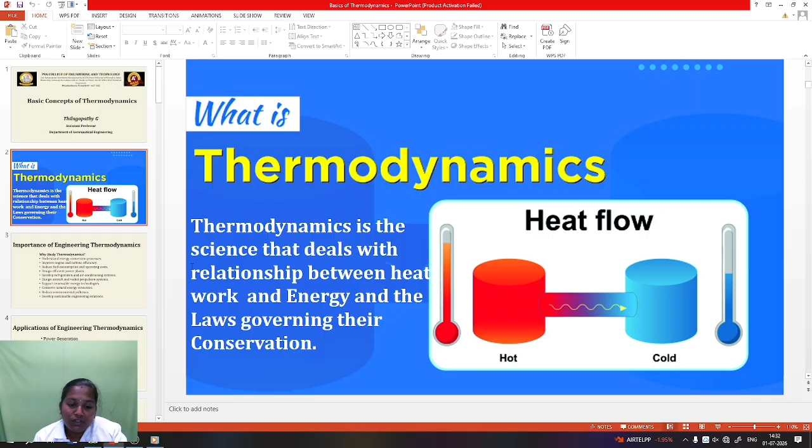So next let us discuss why thermodynamics is one of the most important studies in engineering, especially in aeronautical engineering. Every engineering system either produces energy, transfers energy, or uses energy efficiently. Thermodynamics provides the scientific principles needed to understand and improve this energy conversion process. Let us discuss each point one by one.

First, understand the energy conversion process. For example, in an aircraft engine, chemical energy in aviation fuel is converted into heat energy during combustion. Heat energy is converted into mechanical energy by the turbine. Finally, mechanical energy produces thrust to propel the aircraft. Without thermodynamics, engineers cannot analyze this energy transformation.

Second, by applying thermodynamic principles, engineers can improve engine and turbine efficiency, reduce specific fuel consumption, increase flight range, lower airline operating cost, and improve overall aircraft economics.

Next, thermodynamics is not limited to aircraft. It is also used in thermal power plants, nuclear power plants, and combined cycle power plants. The same thermodynamic principles used in gas turbines are also applied in aircraft propulsion systems. To provide a comfortable cabin environment, aircraft use environmental control systems (ECS). Thermodynamics helps to design aircraft air conditioning systems, cabin pressurization, and refrigeration cycles, and it is important for designing aircraft and rocket propulsion systems. This is one of the most important applications for aeronautical engineers.

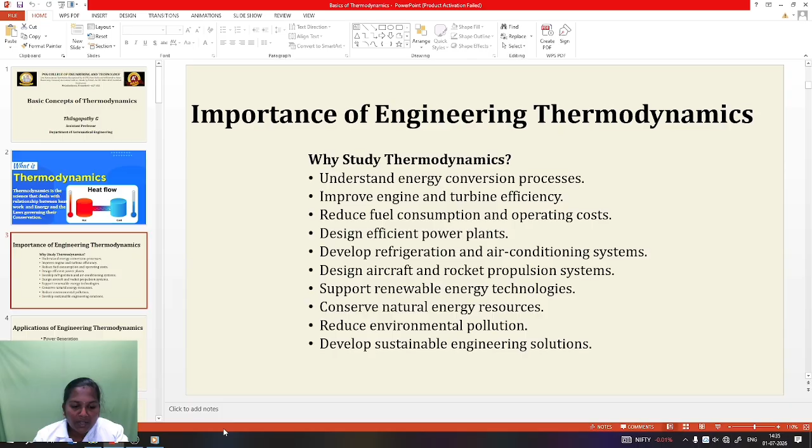And modern aviation is moving towards cleaner energy sources. So thermodynamics contributes to solar thermal systems, hydrogen powered aircraft, sustainable aviation fuels, fuel cell technology, and the like. Fossil fuels are limited resources. By improving engine efficiency through thermodynamics, engineers can consume less fuel, extend the availability of natural resources, and promote energy conservation. So next, as future aeronautical engineers, you will use thermodynamics to build safer, cleaner and more efficient aircraft.

Now that we have understood the importance of thermodynamics, let us see where it is applied in real engineering systems. Thermodynamics is one of the most widely applied branches of engineering. Every system that involves heat, work, or energy conversion uses the principles of thermodynamics. Let us discuss some important applications.

Number one, power generation. One of the major applications of thermodynamics is in power plants. In thermal power plants, coal, natural gas or other fuels are burned. Heat is used to convert water into high pressure steam. The steam rotates the turbine, involving boiler efficiency, turbine efficiency, overall plant efficiency, and fuel consumption. The goal is to generate maximum electricity while using minimum fuel.

Next, automobile engineering. Thermodynamics plays an important role in automobile engines. In petrol and diesel engines, fuel burns inside the cylinder. Chemical energy is converted into thermal energy, and thermal energy is converted into mechanical energy. This work rotates the wheels of the vehicle. Engine performance, fuel economy and emissions are analyzed using thermodynamic principles.

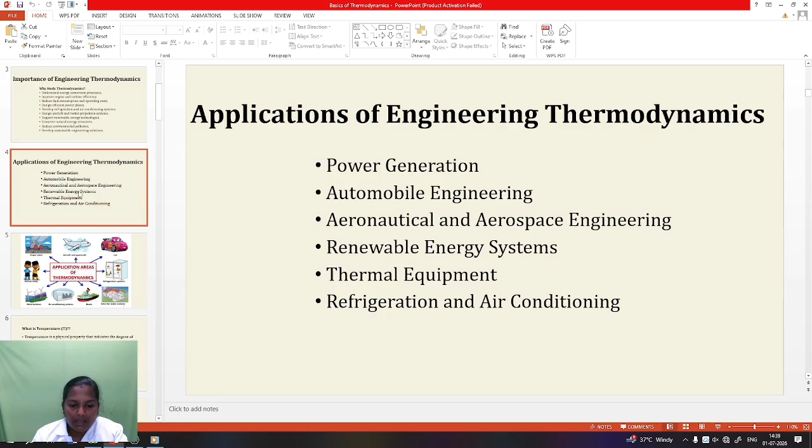Next, thermal equipment. Many industrial devices are designed using thermodynamic principles. Examples include boilers, heat exchangers, steam turbines, compressors, pumps, and condensers. These devices are used to convert energy, making thermodynamics essential for their design and operation.

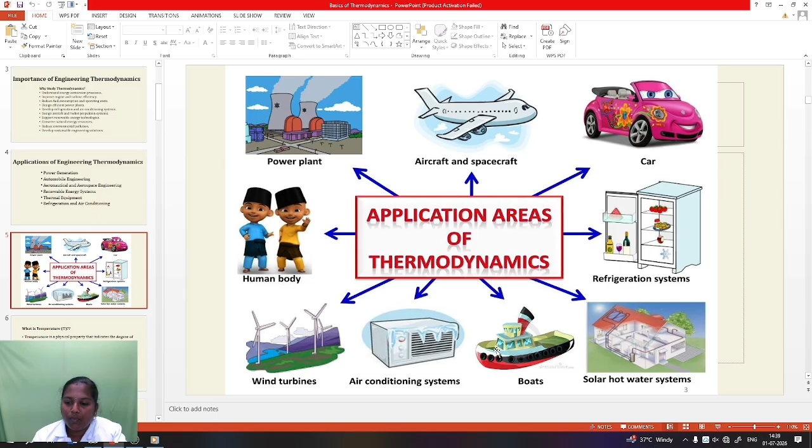These are the pictures for application of thermodynamics in areas like power plants, aircraft, spacecraft, cars, air conditioning systems, boats, solar hot water systems, and refrigeration systems.

Now let us understand one of the most fundamental concepts in thermodynamics. What is temperature? Temperature is a physical property that indicates how hot or cold a body is. In simple terms, it tells us the thermal condition of an object. Temperature is related to the average kinetic energy of molecules in the substance. The faster the molecules move, the higher the temperature; conversely, slower molecular motion indicates lower temperature.

One of the most important roles of temperature is that it determines the direction of heat transfer. For example, imagine placing a metal spoon in a cup of hot tea. The spoon initially has a lower temperature than the tea. Heat flows from the hot tea to the cooler spoon, causing the spoon's temperature to rise. After some time, both reach nearly the same temperature and the heat transfer stops. So heat transfer stops when thermal equilibrium is reached.

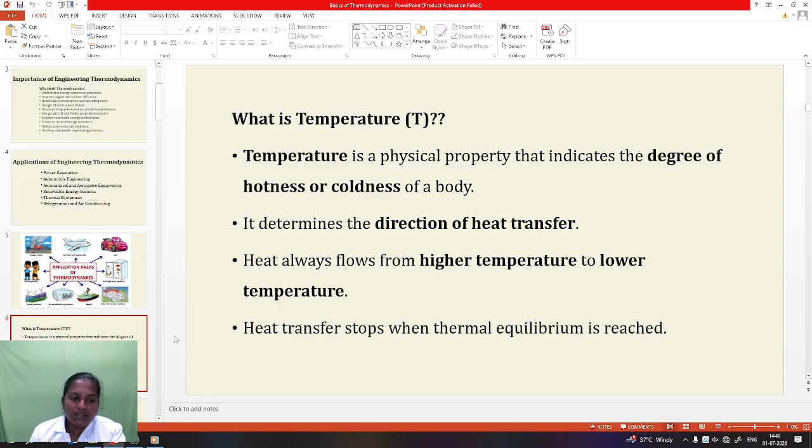In the previous slide we learned about temperature. Now let's understand what is absolute temperature. In our daily life we can use Celsius; we commonly use the Celsius scale to measure temperature. However, in engineering thermodynamics we use the Kelvin scale, which is known as the absolute temperature scale. The Kelvin scale starts from absolute zero, which is the lowest possible temperature that can exist.

What is absolute temperature? Absolute zero is the temperature at which the molecules of a substance possess minimum thermal energy. At this temperature, molecular motion becomes almost negligible. According to the laws of thermodynamics, no temperature lower than absolute zero is theoretically possible. The value of absolute zero is 0 Kelvin, which is equal to minus 273.15 degrees Celsius. At absolute zero, molecular motion is minimum.

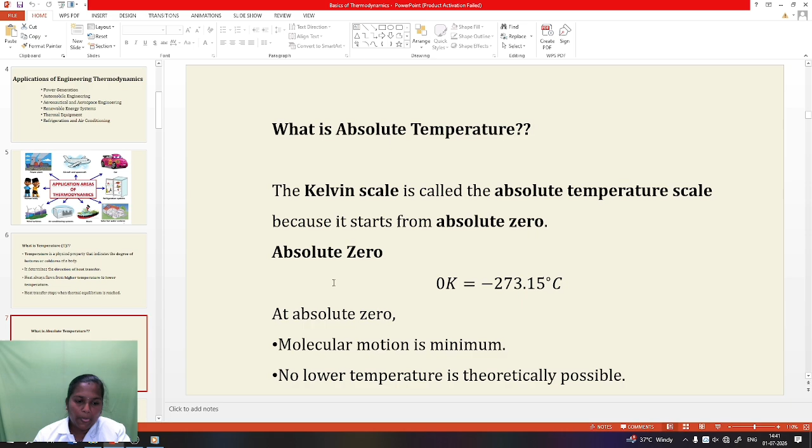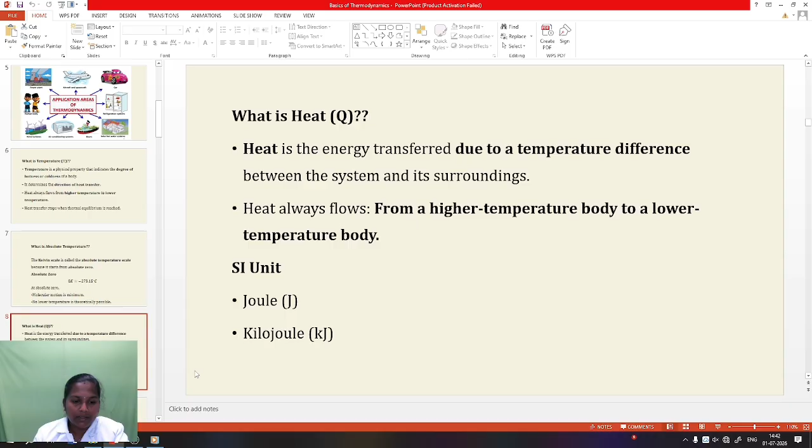Next, what is heat? Heat is the energy transferred due to temperature difference between the system and its surroundings, as already discussed earlier. Let us understand another important property called specific heat. Specific heat is the amount of heat required to raise the temperature of 1 kilogram of substance by 1 Kelvin.

For gases, we use two types of specific heat because gases may be heated under different conditions. Number one, specific heat at constant volume. Number two, specific heat at constant pressure. So what is specific heat at constant volume? Imagine a gas enclosed in a rigid container. Since the container cannot expand, its volume remains constant.

When heat is supplied, the temperature of the gas increases, the pressure increases, and the volume remains unchanged. Since there is no movement of the boundary, no boundary work is done. Therefore, all the heat supplied increases the internal energy of the gas. Heat added is given by Q equal to m times Cv times delta T, where m is mass, Cv is specific heat at constant volume, and delta T is the temperature difference.

Next, specific heat at constant pressure.

Now imagine gas inside a cylinder with a movable piston. When heat is supplied, the gas expands, the piston moves upward, and pressure remains constant. Here, the supplied heat has two purposes: one is increasing the internal energy, and two is performing boundary work by moving the piston.

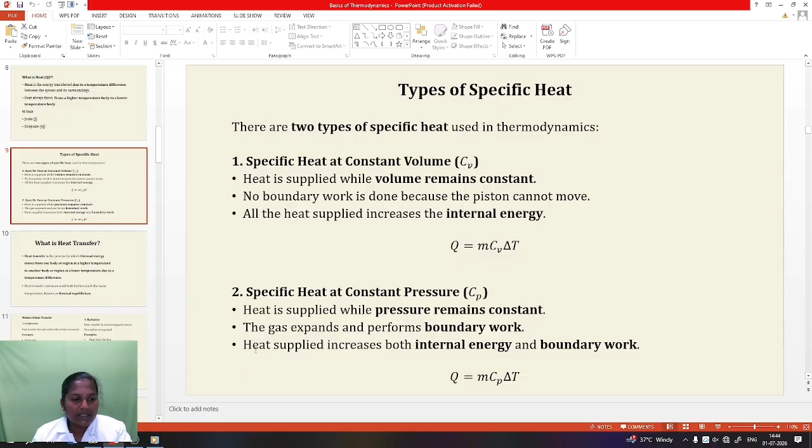Now let us understand the concept of heat transfer. What is heat transfer? Heat transfer is the process by which thermal energy moves from one body or region at high temperature to another body or region at a lower temperature due to the temperature difference between the two.

For example, if you place a cold metal spoon in a cup of hot tea, heat flows from the hot tea to the cooler spoon. This condition is called heat transfer. Heat transfer continues until both bodies reach the same temperature, known as thermal equilibrium.

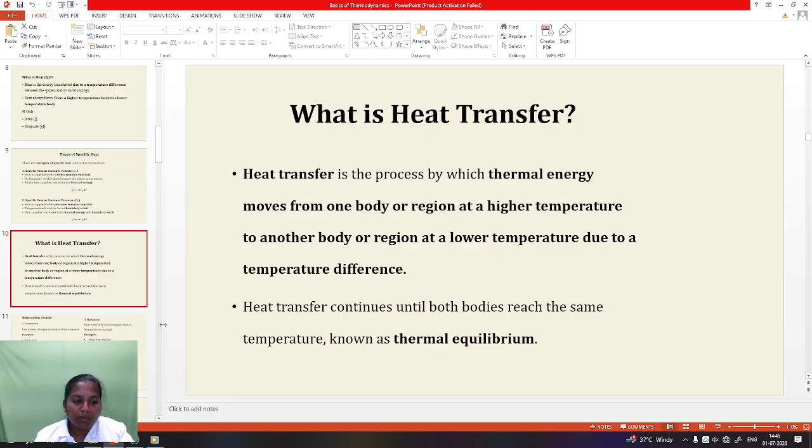Next we discuss the modes of heat transfer. There are three modes of heat transfer: number one is conduction, number two is convection, and third one is radiation. What is conduction?

Conduction is the transfer of heat through a solid without the movement of material itself. Heat flows from the hotter region to the cooler region through molecular interactions. Examples: heat passing through the wall of an aircraft engine, heat transfer through the boiler wall.

What is convection? Convection is the transfer of heat between a solid surface and a moving fluid such as air or water. The fluid carries heat as it moves. Examples: air flowing over the aircraft wing, cooling of an engine radiator, cooling of a turbine blade using airflow.

Convection can be divided into two categories: one is natural convection, and the other is forced convection. Natural convection is caused by density differences. Forced convection is caused by fans, pumps, or compressors.

Radiation is the transfer of heat by electromagnetic waves. Radiation does not require any material medium. For example, heat received from the sun, heat emitted by a furnace, spacecraft receiving solar radiation. Since space is a vacuum, radiation is the only mode of heat transfer there.

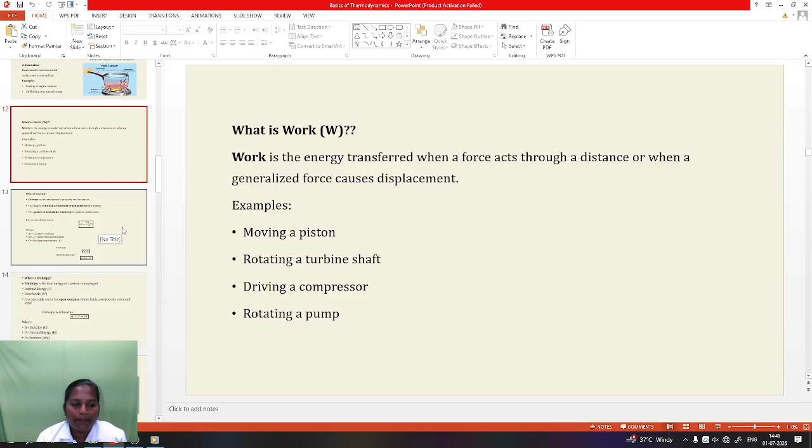The SI unit for work is joule. Examples of work: moving a piston in an engine cylinder, rotating the shaft of a turbine, driving a compressor, operating a pump, producing thrust in a jet engine. These are the examples of work.

Next, we discuss what is entropy, one of the most important and sometimes challenging concepts in thermodynamics. In engineering thermodynamics, entropy is a thermodynamic property that measures the degree of molecular disorder or randomness in a system, the quality or availability of energy to perform useful work. The greater the randomness of molecules, the greater the entropy.

Imagine two situations: ice, where the water molecules are closely packed and well organized, therefore entropy is low. Next is steam, where the molecules move freely in all directions and are highly disordered, therefore entropy is high. As a substance changes from solid to liquid and then to gas, its entropy increases.

For a reversible process, the entropy equation is dS equal to delta Q divided by T, where dS is change in entropy, delta Q is reversible heat transfer, and T is absolute temperature. The unit of entropy is kilojoule per Kelvin. For specific entropy, the unit is kilojoule per kilogram Kelvin.

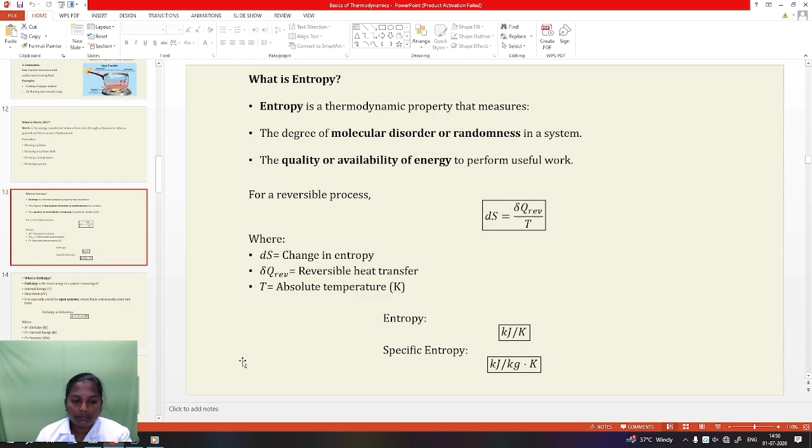So next, what is enthalpy? Enthalpy is the total energy of the system consisting of internal energy and flow work. It is especially useful for open systems where fluids continuously enter and leave.

Enthalpy is defined as H equal to U plus PV, where H represents enthalpy with unit kilojoule, U represents internal energy, P represents pressure, and V represents volume.

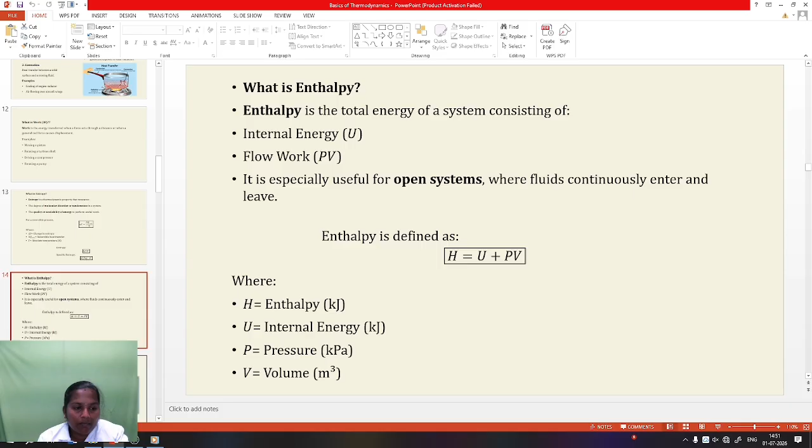Now let us study the two approaches used in thermodynamics, called the macroscopic or microscopic approach. The macroscopic approach is also called classical thermodynamics, and the microscopic approach is also called statistical thermodynamics. So what is the macroscopic approach? These are the two approaches used in thermodynamics.

The macroscopic approach studies the overall behavior of a system without considering the individual molecules. Instead of observing millions of molecules, we treat the substance as a continuous medium and measure only the properties that we can observe directly. These measurable properties include pressure, volume, temperature, and density, like moles.

For example, if we have a cylinder containing air, we do not study the motion of each air molecule. Instead, we simply measure the pressure, temperature, volume of the air. Using these properties, we can analyze the behavior of the system. This approach is called classical thermodynamics because it deals with the system as a whole.

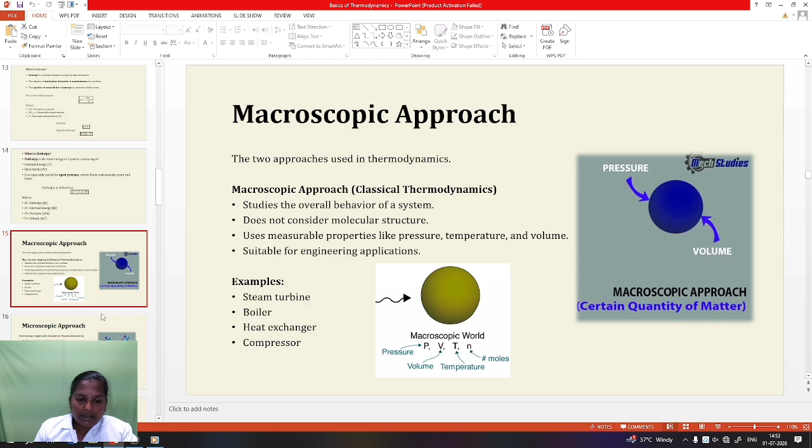The second method to study a thermodynamic system is called the microscopic approach or statistical thermodynamics. Unlike the macroscopic approach, the microscopic approach studies the behavior of individual molecules and atoms. Every gas contains billions of molecules that are constantly moving and colliding with one another. Instead of measuring only pressure and temperature, this approach analyzes molecular motion, molecular velocity, molecular collisions, and molecular energy distribution. Since it is impossible to track every molecule individually, statistical methods and probability theory are used to predict the overall behavior of the system. This is why it is also called statistical thermodynamics.

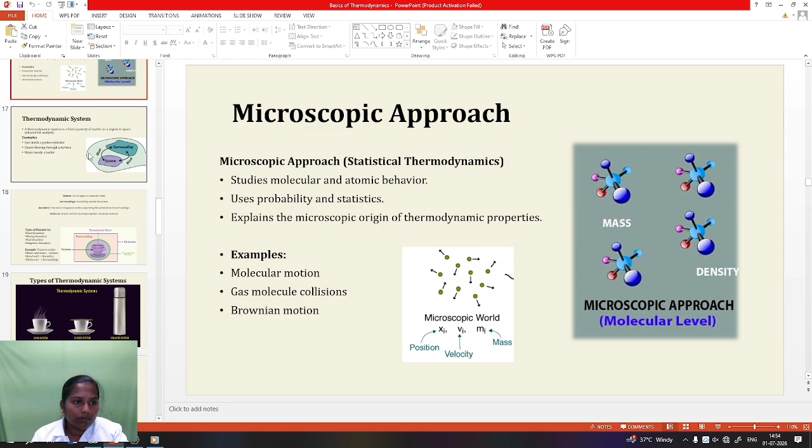Now let us discuss one of the most fundamental concepts in thermodynamics, the thermodynamic system. Before analyzing any engineering problem, we must first define the system we want to study. What is a thermodynamic system? It's a fixed quantity of matter or region in space selected for analysis. In simple words, it is the part of the universe that we choose to study. Everything inside the selected region is called the system, while everything outside it is called the surrounding.

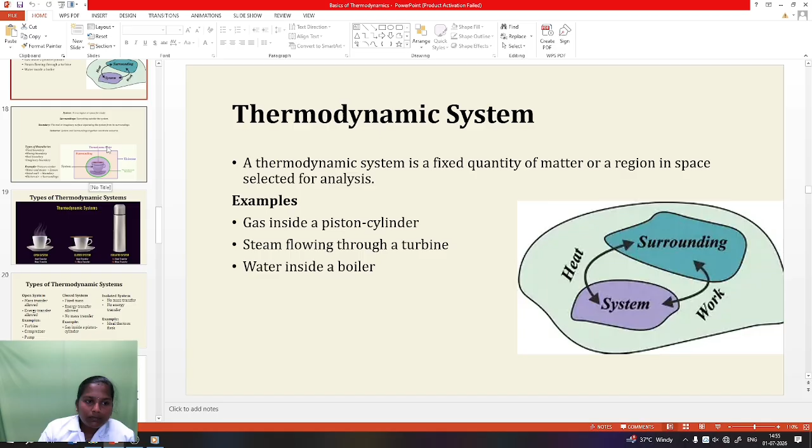Everything outside it is called surrounding. The surface that separates the system is called the boundary. The boundary may be real or imaginary. The combination of system and surrounding is called the universe.

For example, gas inside a piston cylinder. Consider a cylinder filled with gas. The gas inside the cylinder is the system. The cylinder wall and the piston form the boundary. The air outside the cylinder is the surroundings. When heat is supplied, energy crosses the boundary and changes the state of the gas.

Now consider a jet engine. If we select the engine as our system, air enters the engine, fuel is added, and high-speed exhaust gases leave the engine. The engine exchanges both mass and energy with its surroundings. This is a practical example of a thermodynamic system used in aeronautical engineering.

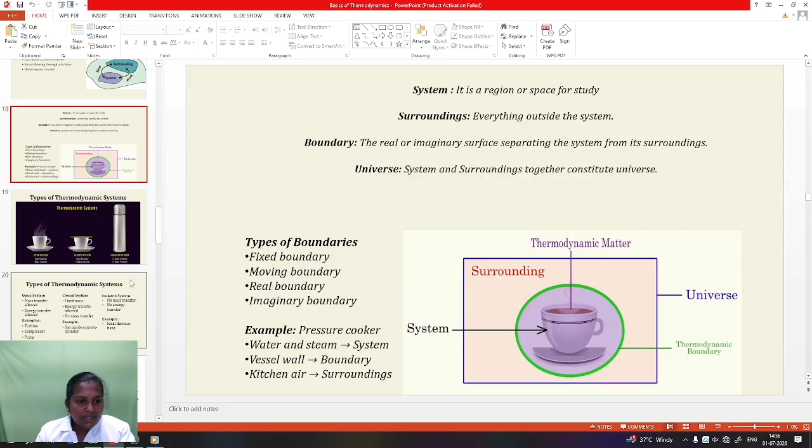In the previous slide, we learned what a thermodynamic system is, and now let us classify the thermodynamic system based on whether mass and energy can cross the system boundary or not. There are three types of thermodynamic system: open system, closed system, and isolated system. Let us discuss each one in detail.

In an open system, both mass and energy can cross the boundary. This means matter can enter and leave the system, and heat or work can also be transferred between system and surroundings. Examples: gas turbine, jet engine, compressor, boiler, turbine.

Let's consider a jet engine. Air enters the compressor, fuel enters the chamber, and hot exhaust gases leave through the nozzle, since both mass and energy cross the boundary. The jet engine is an open system. Most aerospace propulsion systems are analyzed as open systems.

Next, closed system. In a closed system, mass cannot cross the boundary, but energy can cross in the form of heat or work. The amount of matter inside the system remains constant. However, the system can gain or lose heat, and it can perform work, but no gas enters or leaves the system. Therefore, it is called a closed system.

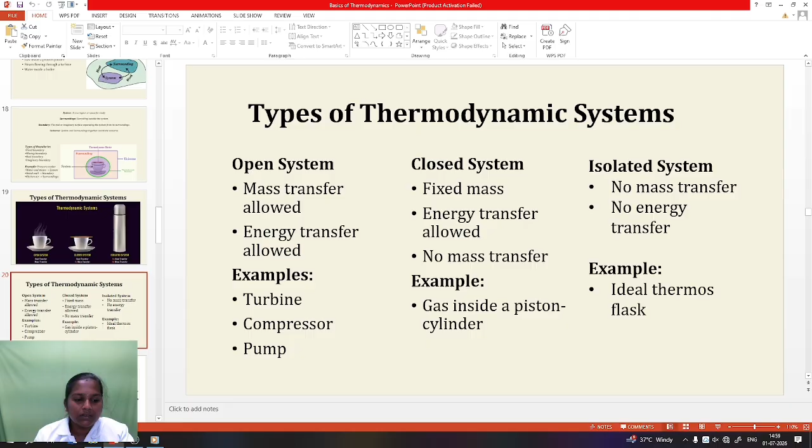Next, this is control mass and control volume. Control mass is a fixed amount of matter chosen for analysis. The amount of mass inside the system never changes, therefore no mass crosses the system boundary. However, heat and work can cross the boundary. So the characteristics of control mass are: a fixed amount of matter, no mass enters or leaves the system, and heat and work may cross the boundary. This is also called a closed system.

Next, control volume. Control volume is a fixed region in space through which mass and energy can flow. Unlike control mass, the amount of matter inside the control volume can change because fluid continuously enters and leaves. So the characteristics of control volume are: a fixed region in space, mass can enter and leave, and heat and work can also cross the boundary. This is also called an open system. Example: jet engine.

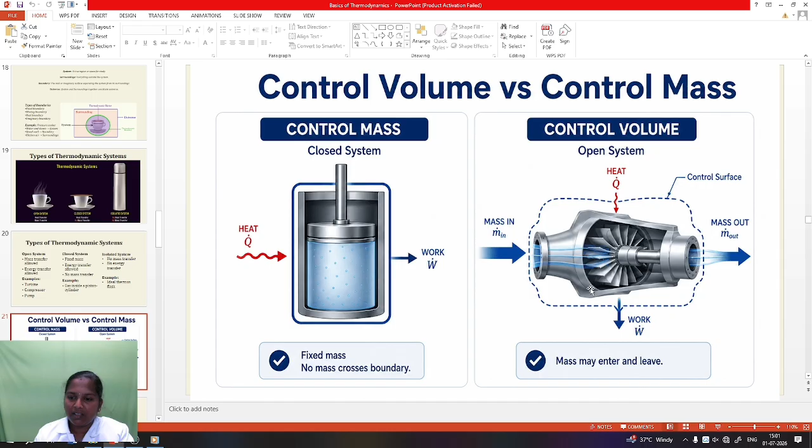Next, we discuss the thermodynamic properties. Thermodynamic properties are measurable characteristics that describe the state of a system. By measuring these properties, we can completely understand the behavior of the system. Some important thermodynamic properties are pressure, temperature, volume, density, specific volume, internal energy, enthalpy, entropy. These were already discussed in the previous slide.

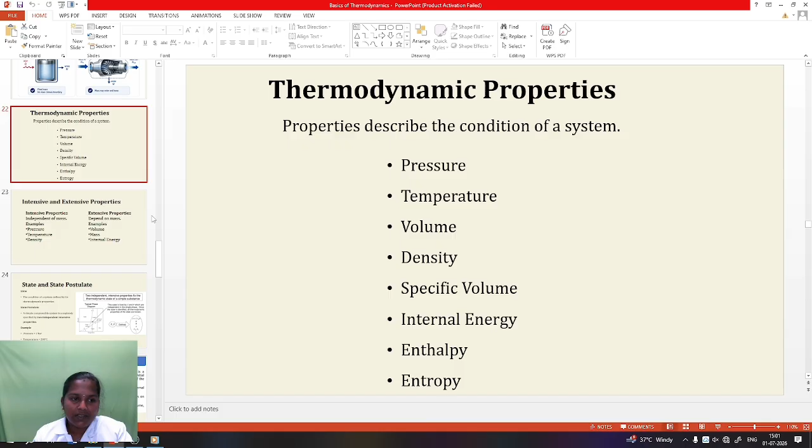Next, thermodynamic properties are classified into two types: intensive properties and extensive properties. Intensive properties depend on mass... wait, intensive properties are independent of mass, while extensive properties depend on mass. Examples of intensive properties are pressure, temperature, density. Examples of extensive properties are volume, mass, and internal energy.

For example, consider two identical water tanks, each containing 100 liters of water. If we combine them, the total volume becomes 200 liters, so the volume is increased - this is called an extensive property. However, if both tanks are at 30 degrees Celsius, the combined water is still at 30 degrees Celsius, so temperature is an intensive property. This classification is very useful when solving thermodynamic problems and selecting the correct equations.

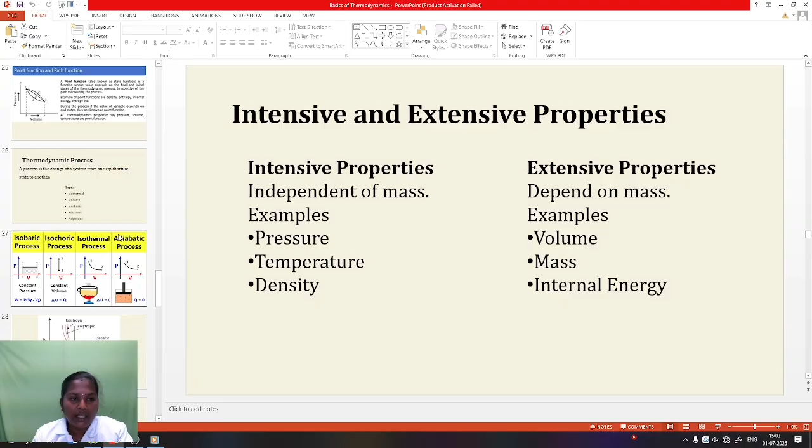Next, let us discuss the concept of state and the state postulate. State means the condition of the system, which is defined by its thermodynamic properties, and is completely described by its properties. For example, if a gas has pressure 2 bar and temperature 200 degrees Celsius, these values define the state of the gas.

The state postulate states that a simple compressible system is completely specified by any two independent intensive properties. This means that if we know any two independent intensive properties such as pressure and temperature, we can determine all the remaining properties like volume, internal energy, enthalpy, and entropy using thermodynamic tables or equations.

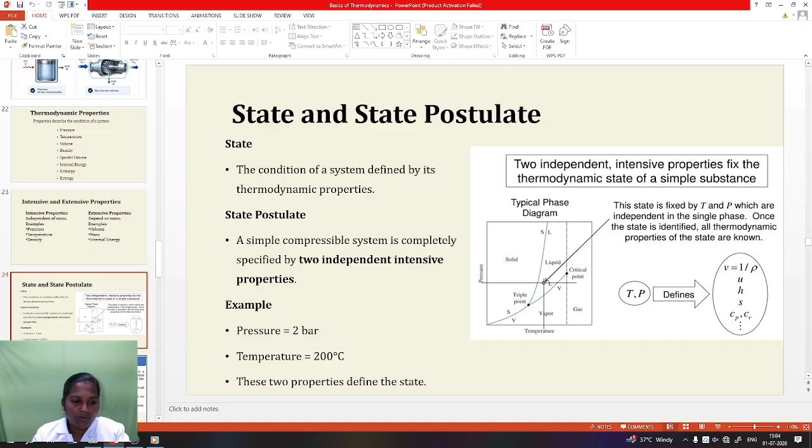Next we discuss point function and path function. Point function, also called state function, is a property whose value depends only on the initial and final states of the system. It does not depend on the path or process followed to reach the final state.

Examples of point functions include pressure, temperature, volume, density, internal energy, enthalpy, and entropy.

Path function depends on how the process is carried out. Its value changes according to the path followed between the initial and final states. Here, 1 and 2 are the point functions, while the ways A, B, C are the path functions. So two important path functions are heat and work.

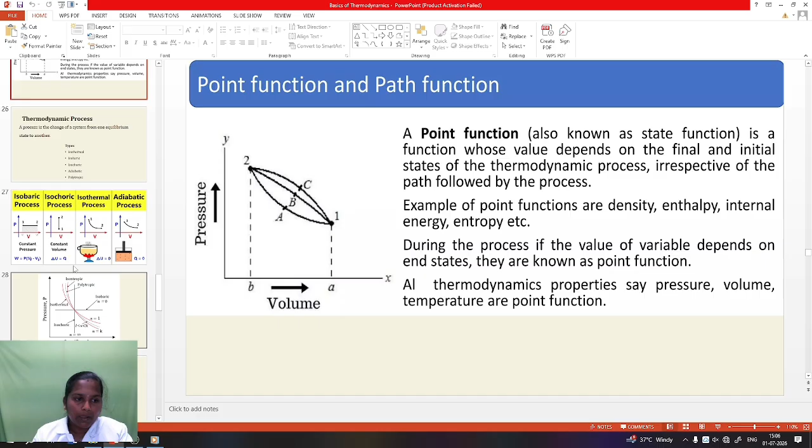Next we discuss the thermodynamic process. A thermodynamic process is a change in the state of a system from one equilibrium state to another. Depending on which property remains constant, thermodynamic processes are classified into five main types.

Number 1 is isothermal, number 2 is isobaric, and isochoric. Isothermal means constant temperature process. Isobaric means constant pressure process. Isochoric means constant volume process. Then there is adiabatic process, isentropic, and polytropic process. These are the main thermodynamic processes we will discuss in the next slide.

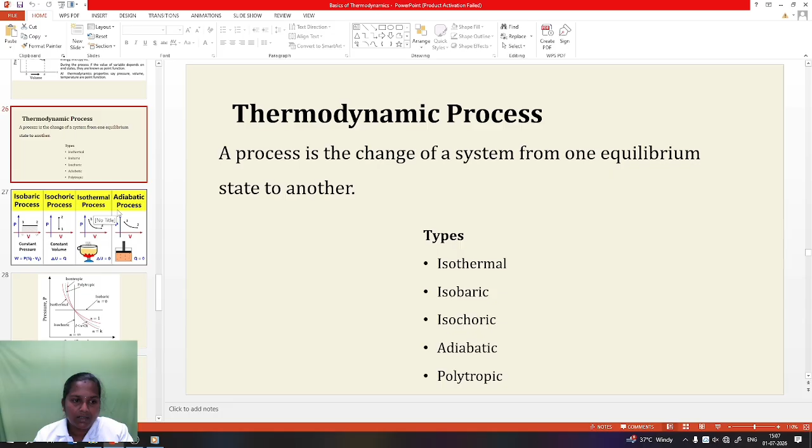The pressure remains unchanged while the volume changes, from an initial volume Vi to a final volume Vf. The work done during the isobaric process is given by W equal to P into Vf minus Vi, where W is work done, P is pressure, Vf is final volume, and Vi is initial volume. Since the volume changes, the gas performs boundary work. Example: heating air inside a cylinder with a freely moving piston, or heating water in an open container.

Next is the isochoric process. In this process, the volume remains constant. In the isobaric process, the pressure remains constant; in the isochoric process, the volume remains constant.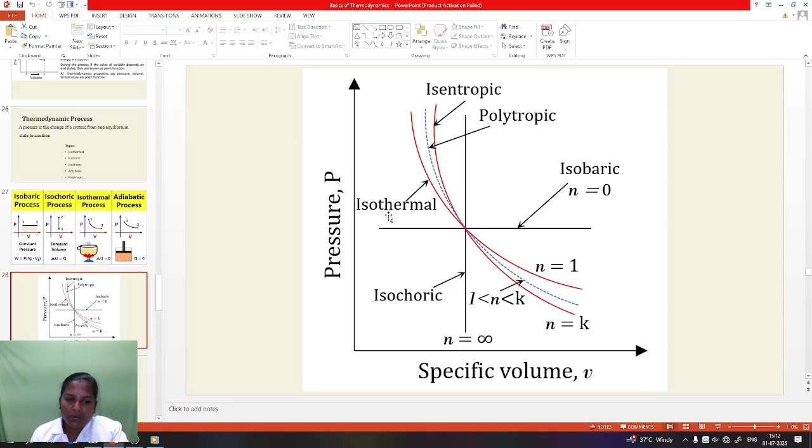Next we discuss the quasi-static process and thermodynamic equilibrium. What is thermodynamic equilibrium? It states that a system has no tendency to change spontaneously with time, provided it is isolated from its surroundings. In thermodynamic equilibrium, pressure is uniform, temperature is uniform, and chemical composition remains constant. So all the macroscopic properties remain constant with respect to time.

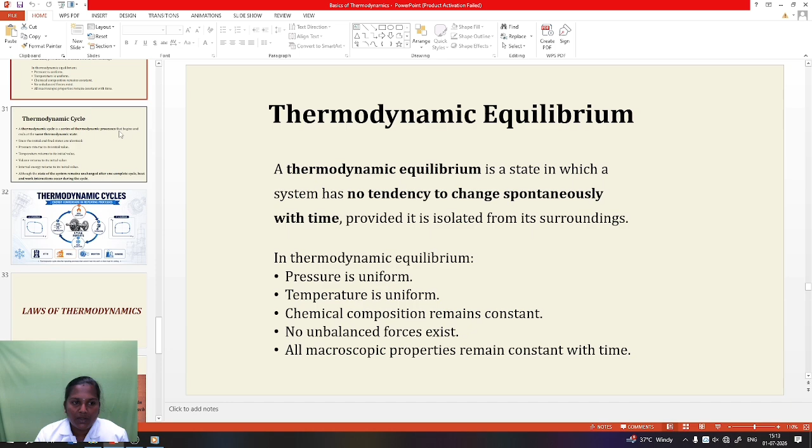This is the thermodynamic cycle. A thermodynamic cycle is a series of thermodynamic processes that begins and ends at the same state. What are the processes in the thermodynamic cycle? Number one is compression and heat addition, expansion, and heat rejection. These are all the processes that happen in the cycle.

Pressure returns to the initial value, temperature returns to the initial value, volume returns to the initial value, and internal energy returns to the initial value. This means the net change in internal energy is 0. Examples of thermodynamic cycles are the Otto cycle, diesel cycle, Brayton cycle, and Rankine cycle.

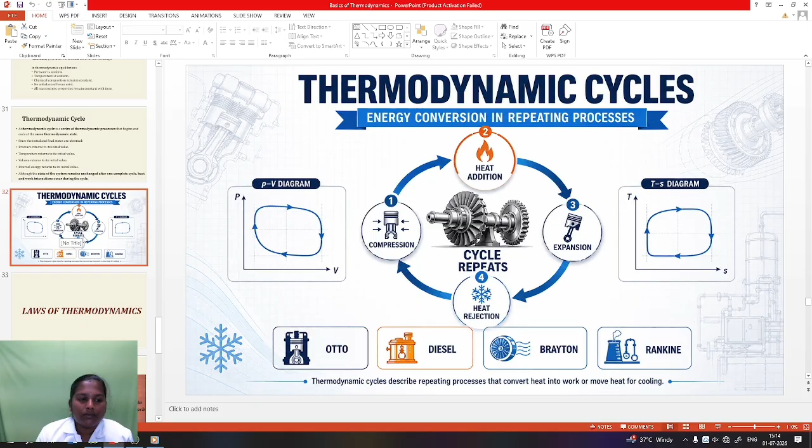Next we discuss the main laws of thermodynamics. What are the laws in thermodynamics? The first one is the zeroth law of thermodynamics.

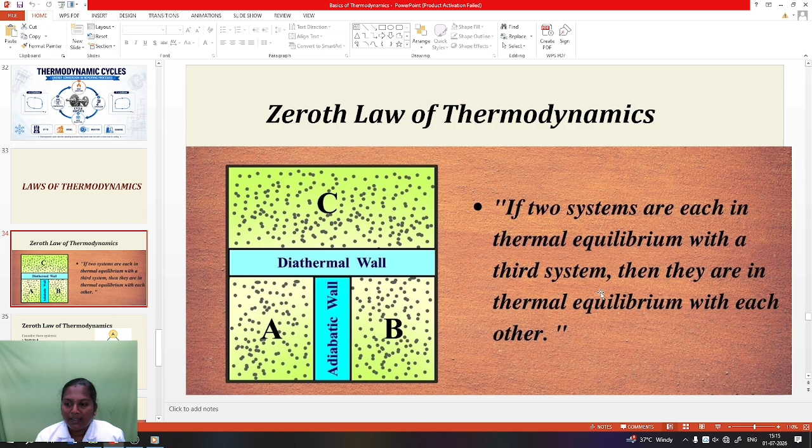Let's consider three systems A, B, C. If system A is in thermal equilibrium with system C, and system B is in thermal equilibrium with system C, then systems A and B are also in thermal equilibrium. Therefore TA equals TB equals TC. This is the statement of the zeroth law of thermodynamics: if two systems are each in thermal equilibrium with a third system, then they are in thermal equilibrium with each other.

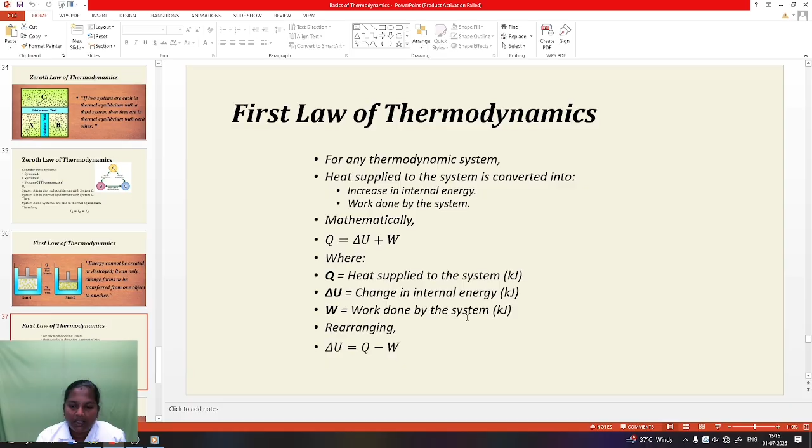Next, the first law of thermodynamics: heat supplied to the system is converted into an increase in internal energy and work done by the system. Mathematically it is expressed as Q equals delta U plus W, as already discussed in the thermodynamic process. Here Q is the heat supplied to the system, delta U is the change in internal energy, and W is the work done by the system. The statement of the first law is that energy cannot be created or destroyed; it can only change forms or be transferred from one object to another, such as heat transfer from one body to another.

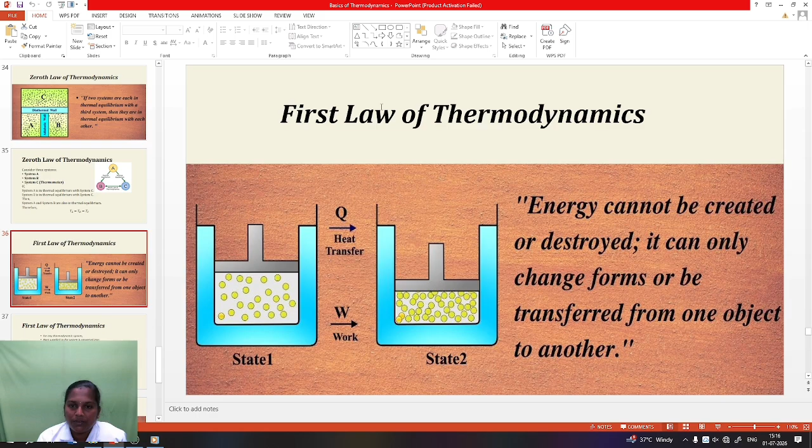The second law of thermodynamics has two statements: the Kelvin-Planck statement and the Clausius statement. The Kelvin-Planck statement says it is impossible to construct a heat engine which produces no effect other than the extraction of heat from a single source and the production of an equivalent amount of work. The Clausius statement says it is impossible to construct a device operating in a cycle that transfers heat from a cold body to a hot body without any work input. These are the statements for the second law of thermodynamics.

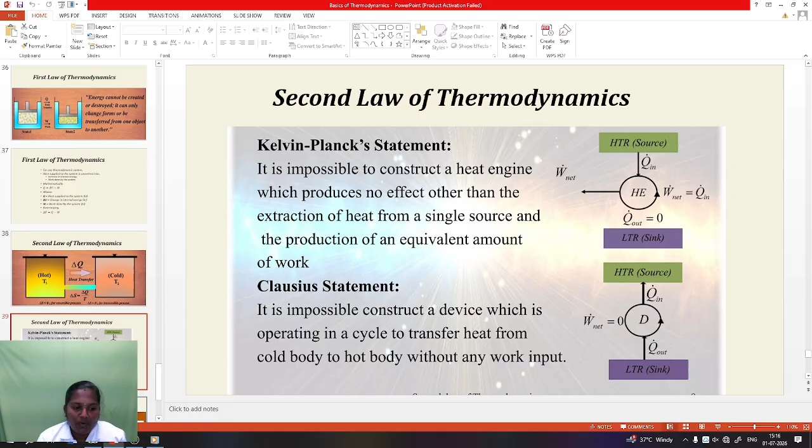The third law of thermodynamics states that the entropy of a perfect crystalline substance is 0 at absolute 0 temperature. That is the third law of thermodynamics.